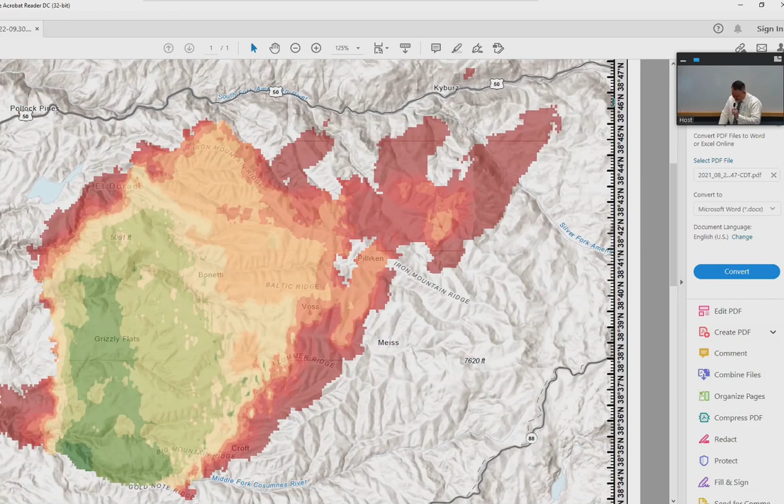And General Manager, did I miss any additional information you'd like to cover? Just to recognize Dan and the operations staff. This has been a very labor-intensive effort in coordinating with the fire group over at the fairgrounds. We attend, I think, 3 meetings a day over there to get the latest updates. There's a cooperators meeting Dan or his staff attends to make sure we're fully coordinated with the fire response operations. And I thought it's been just extremely successful in having that operation coordinated that way.

That pretty much concludes the impromptu briefing of the board. But again, congratulations, Dan, on the efforts so far. And I know the staff has been very, very tired lately, so we'll be implementing kind of rotation and some shifts on that. But good job. Thank you, Jim Landers, we'll definitely pass along your appreciation as well, and I know staff very much appreciate your recognition for their efforts.

We also remember that a large number of our staff are actually evacuated from their homes at this time, so we're having a significantly different work situation, and they're also going home to friends' houses, to hotels, to trailers, so just keep them in mind, please.

Thank you. I just want to make one comment before we go to the clerk of the board. I understand many, many of you are exhausted, and with great appreciation, many of you have even lost your homes. And that is something that we can't take lightly, that you are working full-time, 24 hours a day, and I talked to a person who is an ER physician at UC Davis. He too is exhausted.

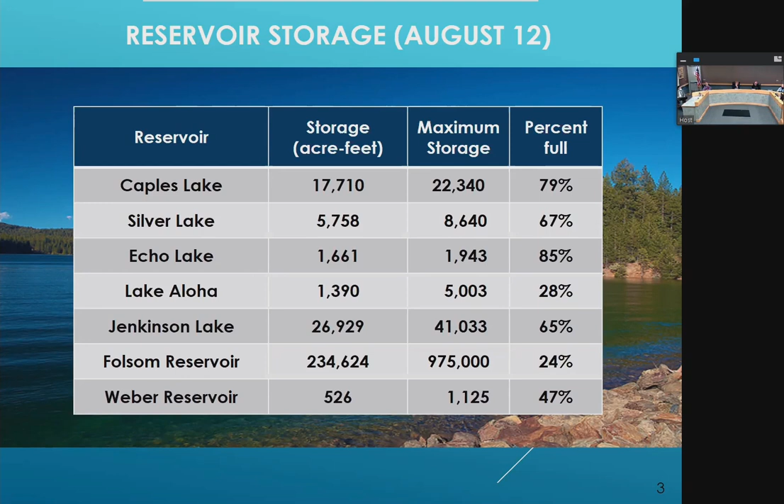Right. I do have a question, if you're done, Alan. On Silver Lake, have we reached out to Amador County to say that we may have to get a deviation from our agreement for the September 15th drawdown that we normally carry with them? I actually don't see the need to do that, Director Osborne. We're a little lower by about 500 acre feet than we typically are, but we don't foresee the need to have any variations from any of our current operational commitments and/or license requirements for this year.

We are actually planning on having a shorter outage and then come back online in the fall to resume diversions from Silver Lake during the last part of the year. Some years when we have larger flume replacement projects, we'll be offline until January. In light of this week's events, we'll continue to watch, but we're planning to come online about the middle of November this year. So a shorter outage, a short maintenance period, get back online and start moving that water as quickly as possible, to prepare us for extended drought conditions. Okay, thanks.

Next slide. Sorry. You can tell everybody's propping me up here. Okay, next slide. Okay, I continue to try to improve this slide for you.

As you see, the wetter years we've really put in the background. We're focusing on these comparative years here. Just for orientation, members of the public, this is the storage history of Sly Park Reservoir since it was constructed. This is the only district reservoir that is a 2-year supply reservoir, designed specifically for the purpose that we're in right now, the second year of drought type conditions. Red is our actual operations this year, and the dotted line through the rest of the year is, under a conservative scenario of no precipitation through the end of the year, where we would likely be by the end of the year.

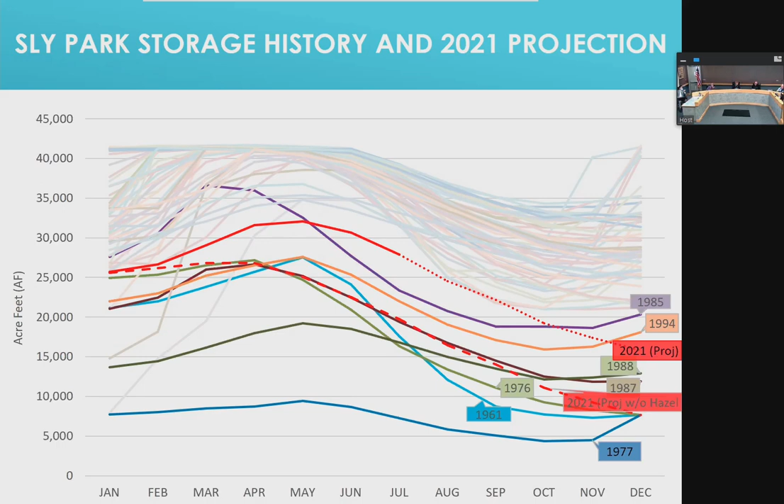And before we leave this slide, we are pursuing the point of rediversion to bring water up and divert out of Kyburz. If we're able to do that in a drought situation, that solid red and then dotted line would be up even higher. That's kind of our drought backstop. So that's why it's so important for us to have that point of rediversion approved. Next slide, please.

And then Brian's staff put together weekly updates for us, slightly different numbers, slightly different comparison, but this is just our water usage since the board's action on June 28th. So we're about 2.3% overall higher as of August 11th. Haven't had a chance, obviously, the past week or so to update this. So it'll be really interesting to see next time we get a chance to come to you in the middle of September how we continue to make progress on that.

Next slide, please. Dan, if I can, on that slide, I think I've mentioned it before, I probably will mention it again, that I'm glad we have the 2013 comparisons in there, because I think our district-wide and our customer conservation efforts since 2013 have been very significant. And I think we need to recognize that.

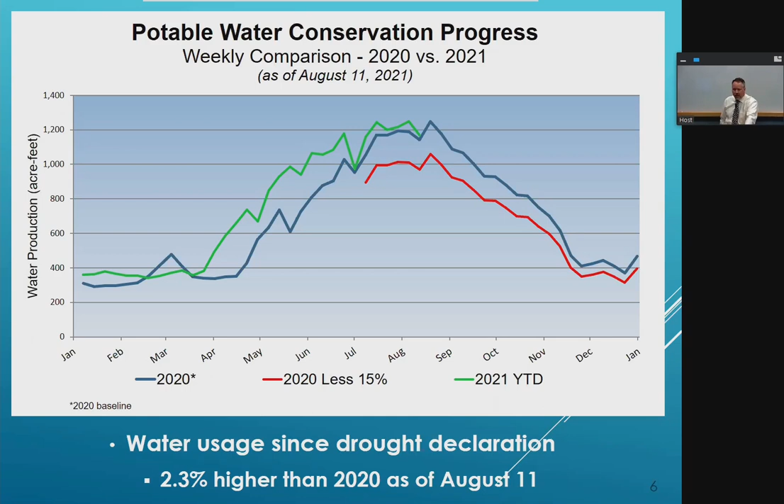Our wastewater recycled water operations manager, Tracy, gave you a nice detailed presentation last time about how we operate our recycled water system and how our potable water system supplements its operations. All of their scheduled operations remain on track and continue, notwithstanding this week's events. Our operations continue. That reservoir at El Dorado Hills is on target.

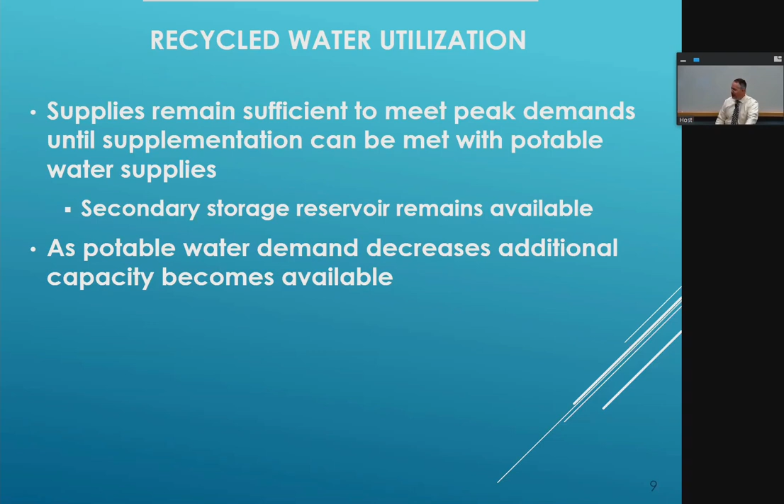Things are going well. As we get this week's numbers, it will be interesting with the smoke and the inversion. Cooler weather, we likely had a pretty good dip in demand this week. I just haven't had a chance to look at it. So next slide, please.

And I think we've really talked to this point, so we don't need to talk any more to Folsom. We gave this update the last meeting. Fortunately, we were able to maintain diversions through the end of July, so over a month. The notice of unavailability of that water supply, I believe, was June 15th. General Counsel, correct me if I'm wrong, but I believe it's June 15th.

So over a month, we were able to sustain operations there through that alternative release from Sly Park Creek that General Counsel was able to secure. So that was a significant win for the district and for the resources. So we're currently in stage 4, and we're providing public health and safety level supplies from the district's main system.

Every day, we're trucking water from the Pleasant Valley area down to Outingdale. Obviously, that's being coordinated with emergency operations because of the evacuations on the east side of that road. The Outingdale community itself is voluntary. East of that is mandatory, because of the active fire situation. We've been, through email, mailing, and phone calls, really reaching out to our customers to make sure they're aware of that situation. And our daily hauling is right on target, about 26,000, which is that public health and safety allocation.

Again, this past week may be a little bit different because of people voluntarily evacuating out of the area, but we're right on target. We're where we should be in terms of the amount of water we should be delivering for public health and safety purposes. And, as you just heard at the beginning of this meeting, we continue to look for potential grant funding for some of these operational expenses.

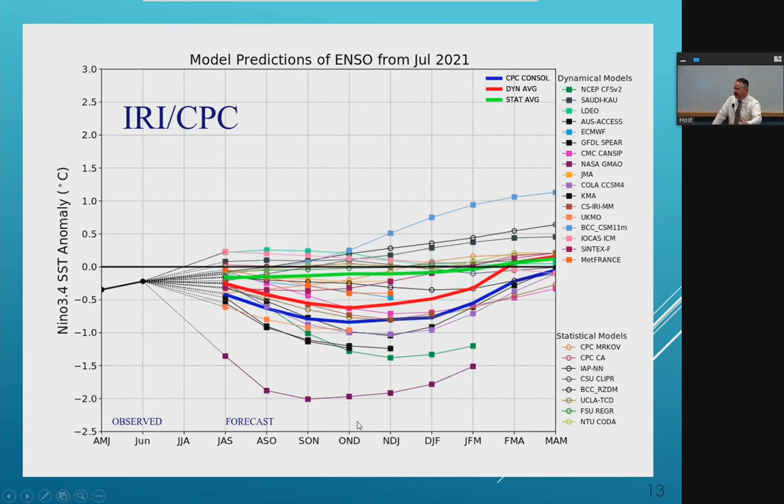Next slide, please. I think everybody's well aware of the lake levels. I think we had a very smooth transition to speed limit restrictions a little earlier than we typically do. We do still have about a dozen boats that are out on the reservoir and are unable to be removed. They were scheduled to be removed by yesterday, but obviously we'll be extending that for those folks.

But there's no damage to any district resource, as I said, or any private assets on the reservoir, fortunately, at this time. They'll probably need a wash of some of the ash on them, but other than that, everything's fine. There's a very heavy law enforcement presence in the region, so we're not concerned about security of those facilities. Once that happens, we will tow that.

This usually happens every winter, but a lot of people aren't up there to see this. You will see the mooring facility pulled out in the middle of the lake, and that's because it can't sit on the lake bottom. It's a typical operation. It's just happening while people are still up there, at least before the fire. So they may ask, why is that thing in the middle of the lake? And that's just to protect it during low water conditions. Next slide, please.

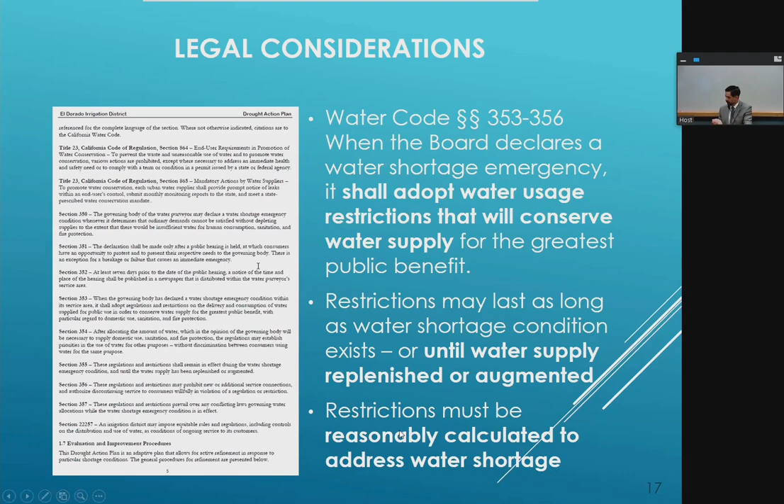So I've just highlighted a couple of relevant provisions here, since Director Day asked specifically, do we have authority to impose a connection moratorium? In other words, can we restrict new customers from connecting to our system? And the answer to that is yes, the district does have that statutory authority under Section 356 of the Water Code. It specifically authorizes connection moratoria.

But again, going back to the provision that I cited on the previous slide, any water use restriction, including a connection moratorium, must be reasonably calculated to address the shortage that exists, okay? If, for example, we have abundant water supplies, then of course, the argument is, well, a moratorium on connections wouldn't be reasonably calculated to address the condition that you have.

And then finally, I just note here that the relevant standard of review under the Water Code is that any action that the district takes to restrict water use must not be fraudulent, arbitrary, or capricious. And that's a fairly deferential standard of review to the district, particularly the fraudulent part. But any restriction, if it's not reasonably calculated to address the shortage conditions that we have, could potentially be deemed arbitrary or capricious.

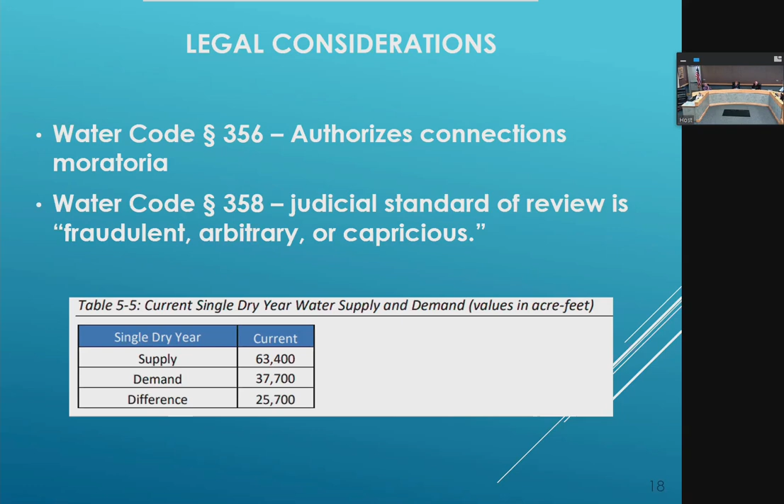So this may actually be my last slide. I thought I had one more chart here on the next one that just showed that, yeah, here we go.

So this is just building upon the last slide that showed our current water supply versus demand for a single dry year. This chart, again taken from the recently adopted urban water management plan, just shows the 5-year outlook. So multiple dry years looking into the future: what are the district supply and demand? And bottom line is, if you go to the right column at the bottom, in the 5th consecutive dry year, as far out as 2045 into our planning future, we still maintain more supply than we will have demand at that point in time. So.

And one of the other, it's more of a long-term question. The question I'd ask was, what are we doing to strategically plan for climate change? I had included a link, because whatever your opinion on climate change is, the U.S. Marine Corps and the U.S. military are planning strategically to cope with it. And so I think if they are, we need to as well. And then, Jim, if you want to touch on what the region is doing. The region, including the water agency, has been preparing the American River. Oh, I'm sorry, Brian, why don't you do that?

Yeah, we've been somewhat involved, but it's mainly been Reclamation, which has a study going with PCWA and El Dorado Water Agency on potential climate change impacts and mitigation actions, looking out 100 years or so. We've been part of that, feeding them information about our system and potential impacts. That report's not yet available. It was supposed to be complete sometime this year, so we'll definitely take a look at that and implement some of those recommendations.

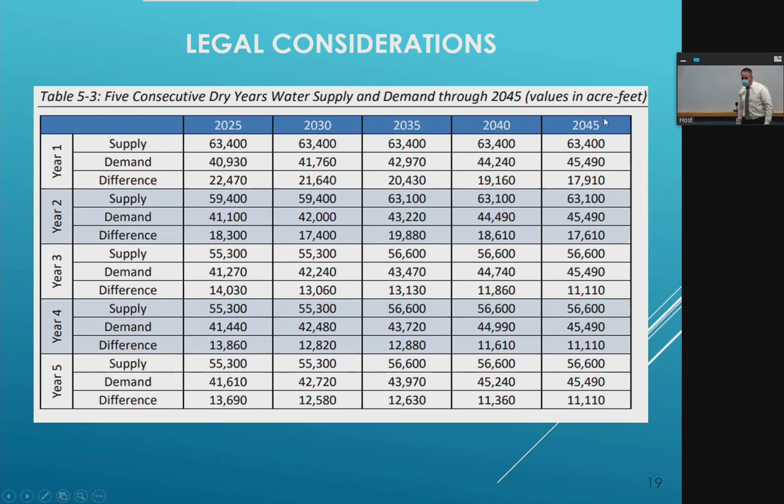All right, just on our topic of ensuring complete and accurate information, I want to make sure, as we discussed related to our partners down the hill, they too have contingency measures, as Brian described, in demand, also in their ability to access water. Actually the Bureau of Reclamation, because of their responsibility to get water to a different point of delivery, does have emergency measures in place. I don't want to leave you thinking they will run out of water before we do. They are implementing similar measures. We're aware of it from a broad level, but we only talk to the level of detail about what our specific agency is doing. And that concludes staff's presentation.

Thank you very much. It was quite a bit of detail, and posting it on social media continues to keep our people informed. So we're going to move on to the action items, item number 10. Director Anzini, you might want to ask for public comment on that information item. Okay, thank you for the reminder. Is there anyone from the public who wants to make a comment on that presentation? Director Anzini, at this time it does not appear there are any members of the public wishing to speak on information item number 9. Thank you. All right, we'll move on to action item number 10. Move one. Second. All right.

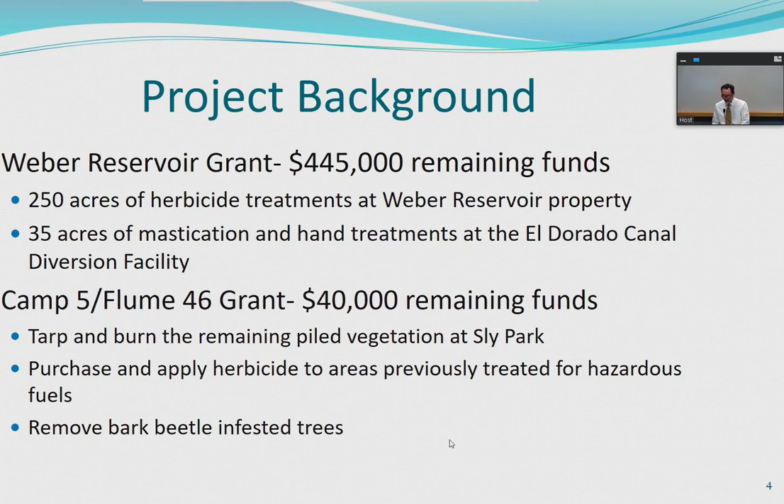Project objectives for the El Dorado Canal diversion facilities are to reduce hazardous fuels and protect district infrastructure and nearby communities, increase the forest and landscape resiliency, and reduce the rate of spread, duration and intensity, and fuel ignition into the crowns of conifer forest.

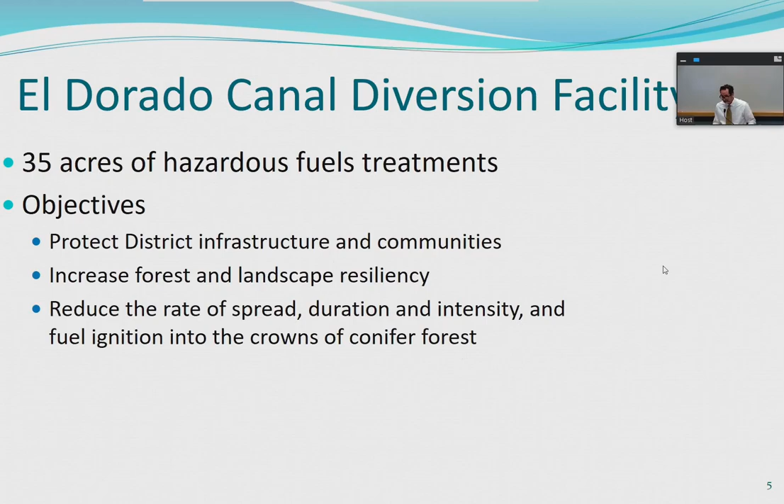Next slide, please. Here's a bit closer of the... Jen, can I get the pointer, please? I will.

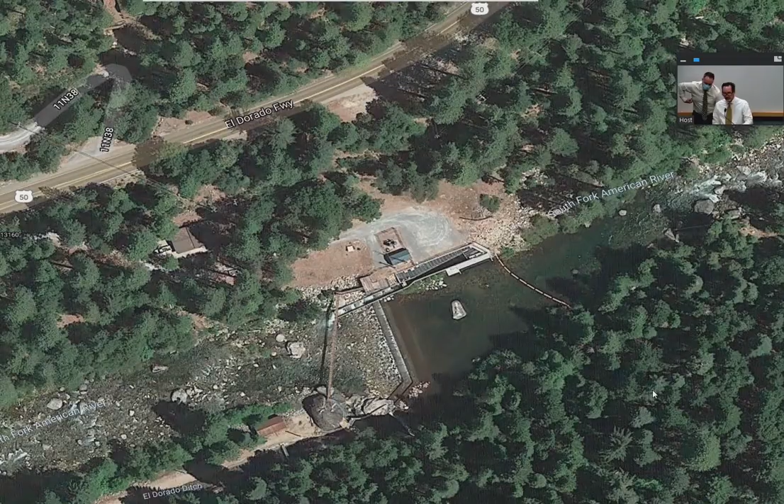Here's a photo of the treatment area looking up and south of the canal. This is just a typical area throughout, that shows the dense fuels that are on both sides of our facilities. Next slide, please.

Moving on to the Reservoir A water treatment plant. The project objectives are the same as for the diversion facility, and that would be to protect district infrastructure and nearby communities, increase the forest and landscape resiliency, reduce the rate of spread, duration, and intensity, and fuel ignition to the crowns of nearby forests. Next slide, please.

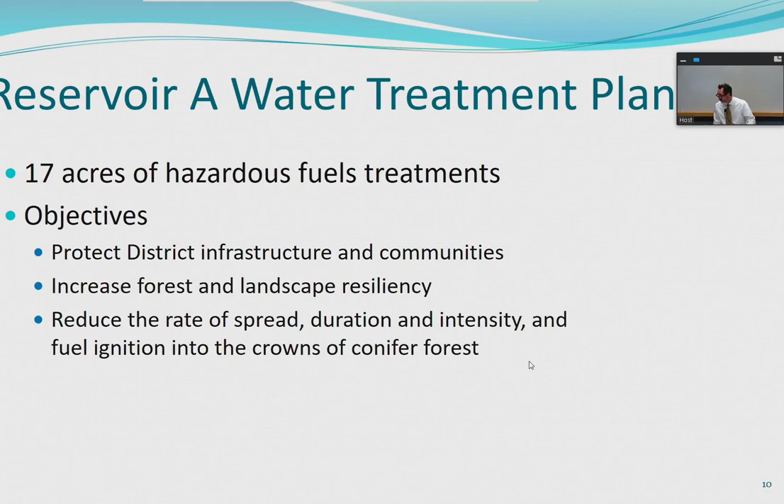As Director Corcoran mentioned earlier, Reservoir A does not go offline and continuously supplies potable water to the district's customers, as well as supplies the majority of the district when the El Dorado Hills drinking water treatment plant is down. It is a critical facility that has a high priority of protection. Next slide, please.

Turning to the California Environmental Quality Act, the board adopted the MND for the diversion facility in June of this year, and staff will file a fuels management exemption for the Reservoir A facility upon the board's award of this contract. Next slide, please.

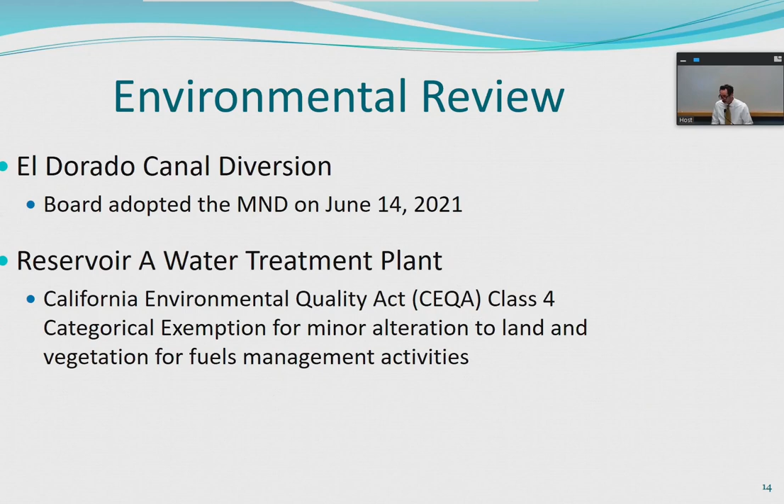The scope of work for the contract includes 10 acres of mastication and 25 acres of hand treatments at the diversion facility, and 15 acres of mastication and 2 acres of treatments at the Reservoir A facility. In addition to the mastication at Reservoir A, that removes all vegetation 10 inches in diameter and below, the Reservoir A scope of work includes removing 45 standing dead or dying trees, as well as removing a large amount of downed trees that have been accumulating over the years. Next slide, please.

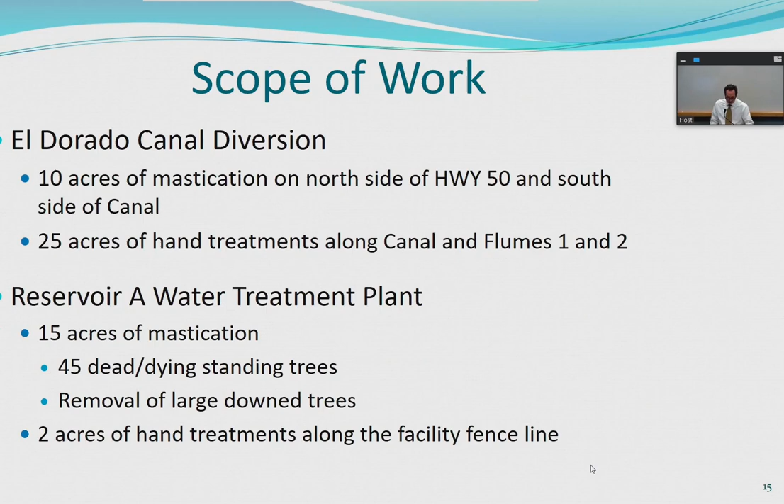Moving on to the received proposals. Staff received 4 proposals, and Julian Tree Care was the responsible low bidder at $182,500. Staff believes that the very large discrepancy between these received proposals was due to the high demand of forestry contractors as well as the relatively small project size.

Just to let the board know, in addition to the job walk, staff and our contracted forester met with Julian Tree Care. We conducted a follow-up site visit as well as reviewed the scope of work and the equipment they're going to be using. Also, Julian Tree Care provided references as well as successful past projects with East Bay MUD as well as the El Cerrito Fire Department. Our staff believes that Julian Tree Care is qualified and equipped to complete all the project requirements as well as meet the objectives. Next slide, please.

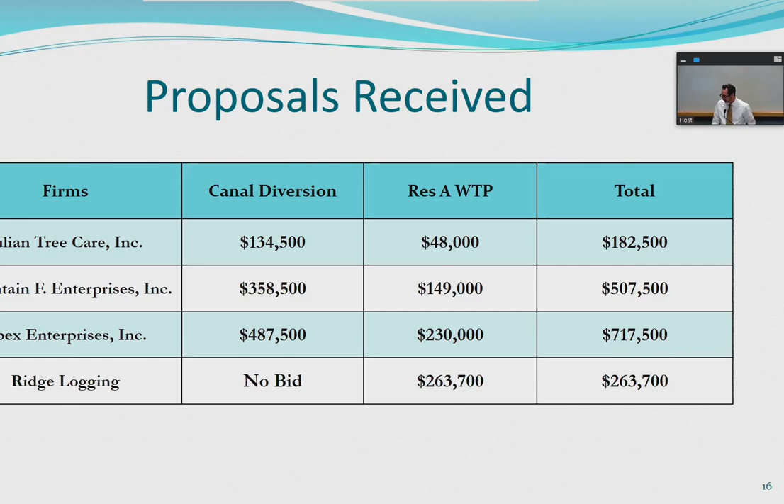So the El Dorado Diversion Canal treatments will be funded fully reimbursable through the remaining CAL FIRE Weber Reservoir grant funds. The Reservoir A treatments will be funded either by a pending CAL FIRE grant that we submitted in May of this year. We expected those results to come out at the end of July. I think they're a bit busy, so they have delayed that. A sister grant for forest health, those results have come out, and it looks like they're pending approval here.

However, if that grant is not awarded, staff will request to utilize the remaining funds from the Weber Reservoir grant just as we did for the diversion. Staff time for administration and project management for the grant are reported to CAL FIRE as in-kind matching funds.

Next slide, please. Board option 1 would be to award a contract to Julian Tree Care Incorporated in the not-to-exceed amount of $182,500 for hazardous fuel treatments at the El Dorado Canal Diversion and Reservoir A treatment plant facilities for the El Dorado Canal Vegetation Management Project.

Next slide. And option 2, the one that's been changed, to award a contract to Julian Tree Care Incorporated in a not-to-exceed amount of $182,500 for hazardous fuel treatments at the El Dorado Canal Diversion and Reservoir A water treatment plant facilities, and authorize the general manager to renegotiate the scope of services if necessary due to the impacts of the Caldor fire. Option 3 would be to take no action, and staff recommends option 2. Move to. I'll second that. Okay, there's been a motion and a second.

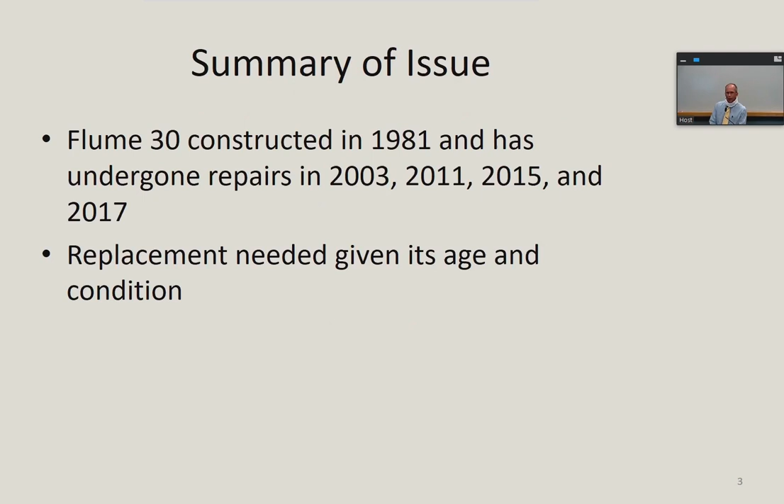Scope of work. We have 3 different scopes of work for this project. The first scope is going to be getting the roads in to access the flume. I'll discuss more of these as I go along through the presentation. The second is to improve the Narrows bypass road. The board will remember some of that, the issues that we've had with that little stretch of roadway. And then next year will be the actual construction of the Flume 30 replacement.

So the road work, the original road work is a 3-mile Forest Service road that is currently in existence. We will be doing a 2,200-foot-long road from the end of that road down to the downstream portal or to Flume 30. And then the actual construction for the flume will be the new mechanically stabilized earth walls and flume sections that will be back in concrete. We'll also be doing a little bit of stabilization on the downstream side of some of the hillside down there. Next slide.

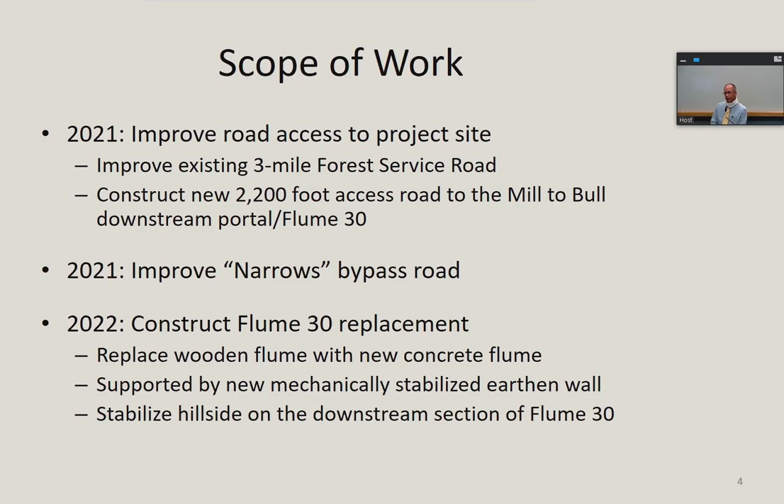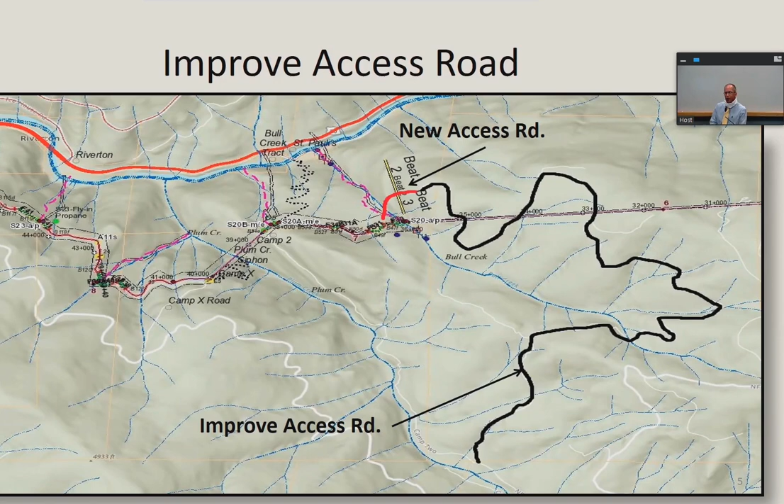So here's the access road. So the portion in black is the 3-mile section. The portion in red, this is roughly drawn in by me, not to any scale or artistic ability, but that is our new access road that will come down onto the old bench and tie in. And can I go to the next slide? We have some pictures we'll get to.

So once again, reiterating, this is a 3-mile long access road, 2,200-foot long connecting road down to the flume. This did eliminate the use of helicopter. We had an estimate of around $4 million for the use of a helicopter. The roads are going to cost about $2 million to get in, so a net savings to the district of $2 million to get this, plus the ongoing ability to reach the Mill to Bull and Flume 30 connection. So those are pretty substantial benefits with just those right there.

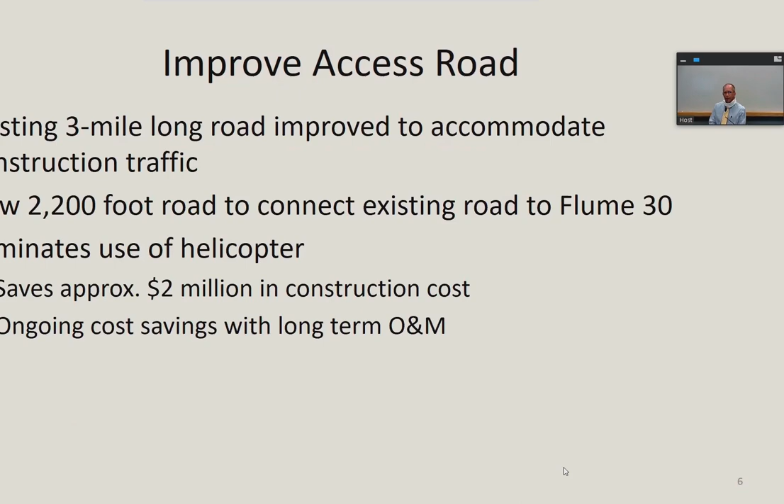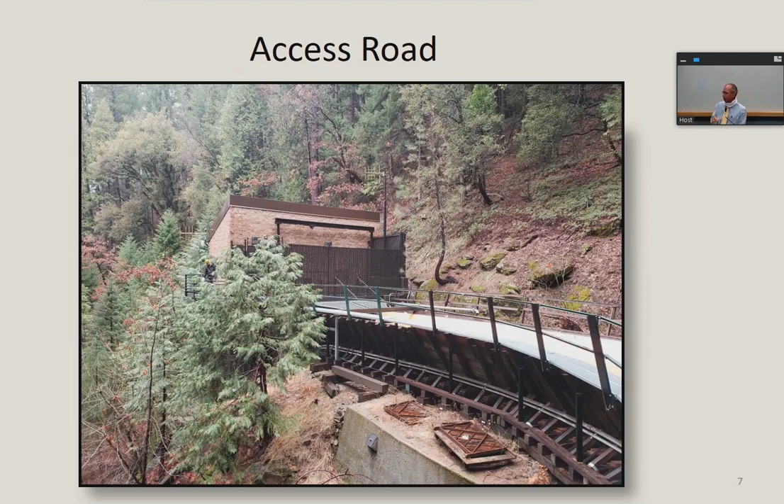Next slide. So this is the Mill to Bull portal right here, and Flume 30 coming out. This road will come onto the right side of that building and connect down into Flume 30, and we'll be using this for construction. We'll be spanning Bull Creek. I'll show you some slides to that a little later on. Next slide. This is the back side of that same building. Those rocks on the left will be removed, and a roadway a little further closer to us will start and go up and over that building.

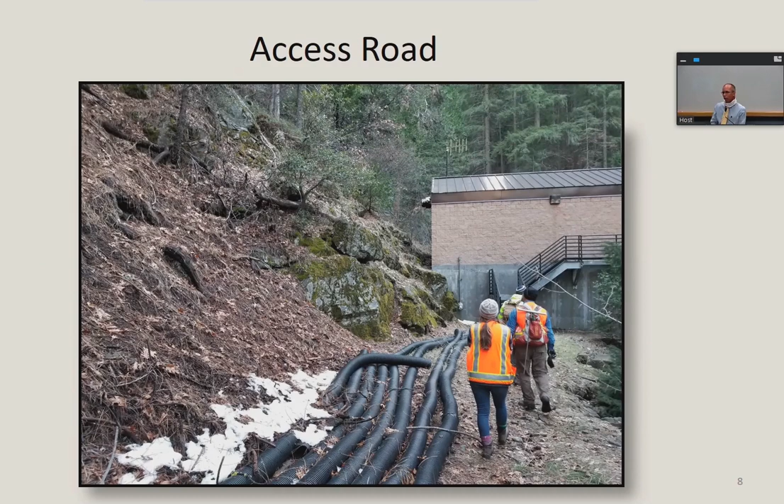Next slide. This is the hill that will be coming down. As you can see, it's pretty steep terrain. It's going to curve around and wind around. But this is what we're getting. The grades will be pretty tricky coming down, but it's all doable and stuff that we've done in the past.

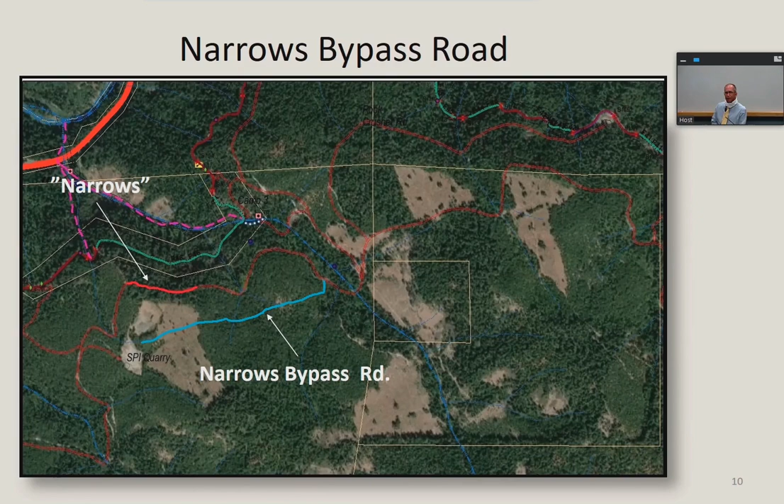We've also had lower speeds to get through this site, and as of our Flume 38/40 job, we have weekly monitoring of the road, meaning that we have a survey crew go out every week, and we have, I believe it's 20 survey pins in the road to detect any movement. So it's quite a bit to just be able to keep using this road. This road, when we are done with it, will only be accessed by SPI and EID. It'll be behind locked gates and only for our use. And it will be all weather.

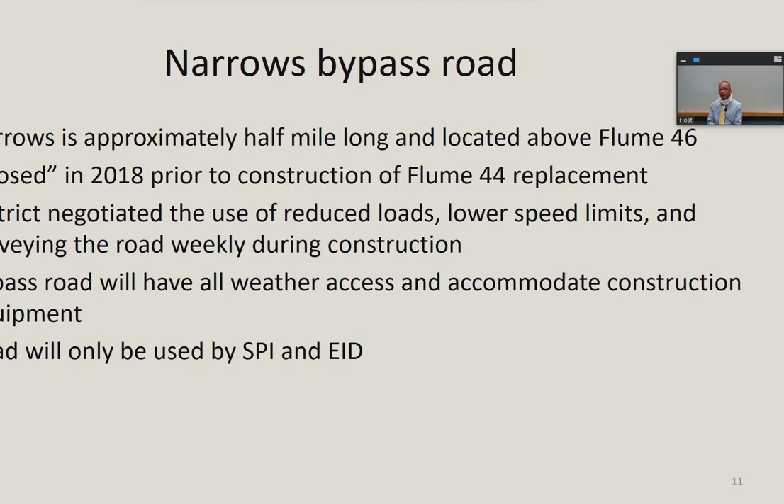It's dirt. We will be putting rock down to make this all weather. It will be able to be plowed so that we can continue to use it to get to our sites on what we call the Beat 3. And this becomes really beneficial because right now on the narrows, we aren't able to really plow the road. We have to scoop the snow all out because right below the narrows is Flume 46, so we can't let the snow go over the edge.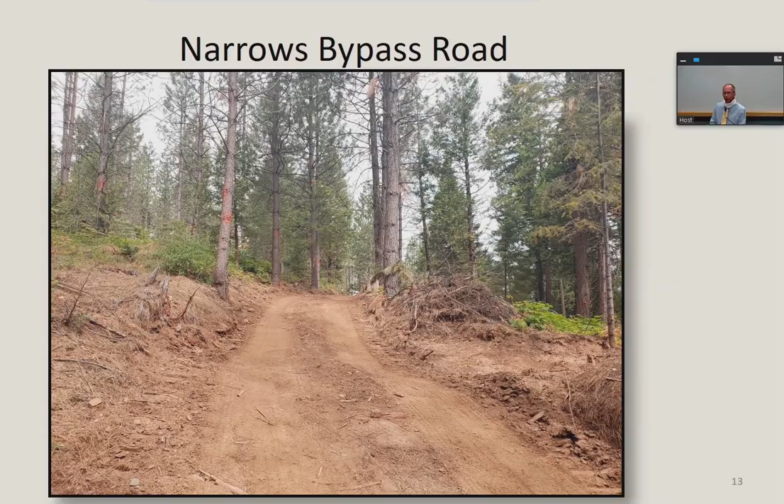Next slide. Now then, Project 30, or Flume 30. You can see its proximity to Flume 44. Just for convenience sake, Flume 3840, which we're just finishing up right now, is right there. This is located about 6 miles in on Plum Creek Road, and then we come in off of Camp X Road. Next slide.

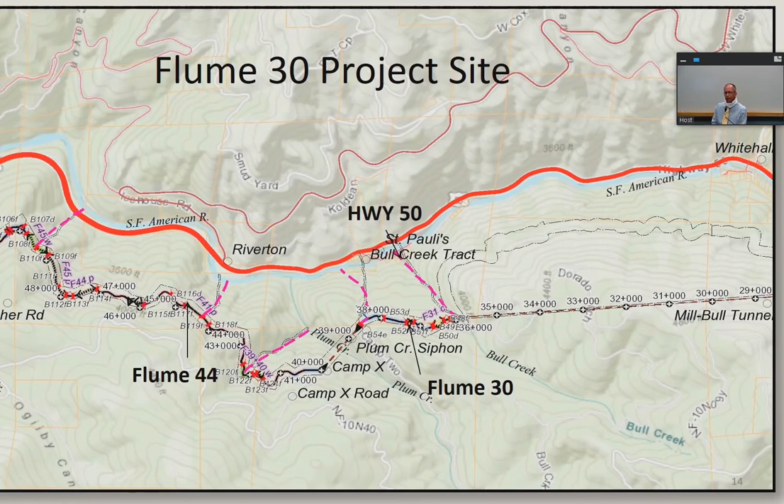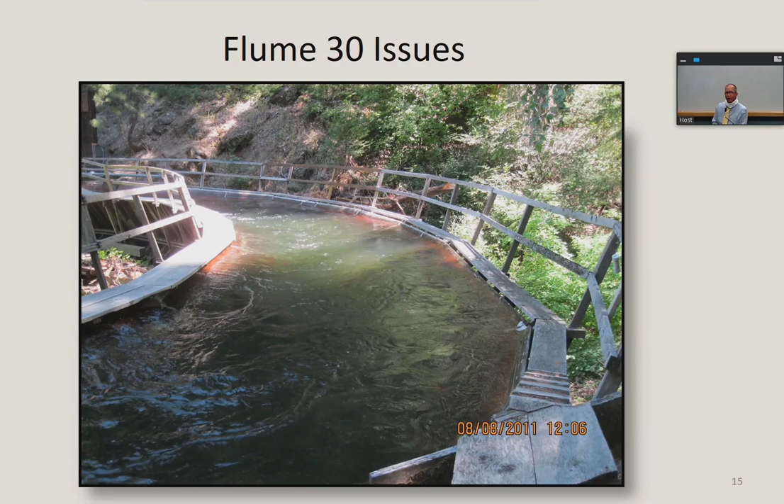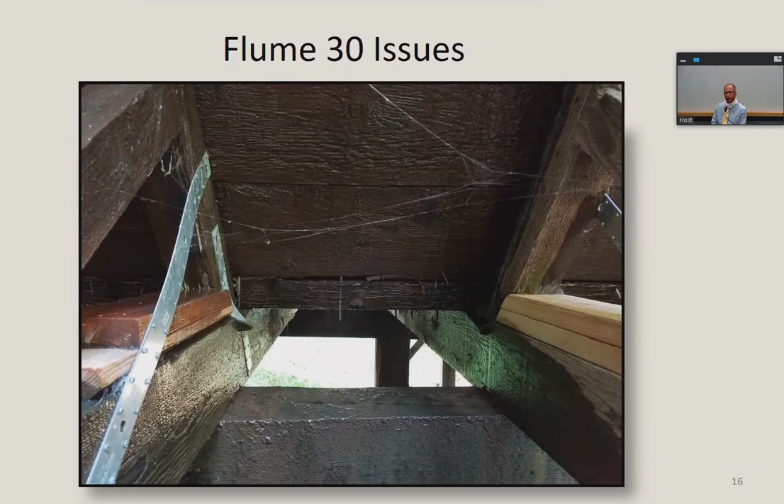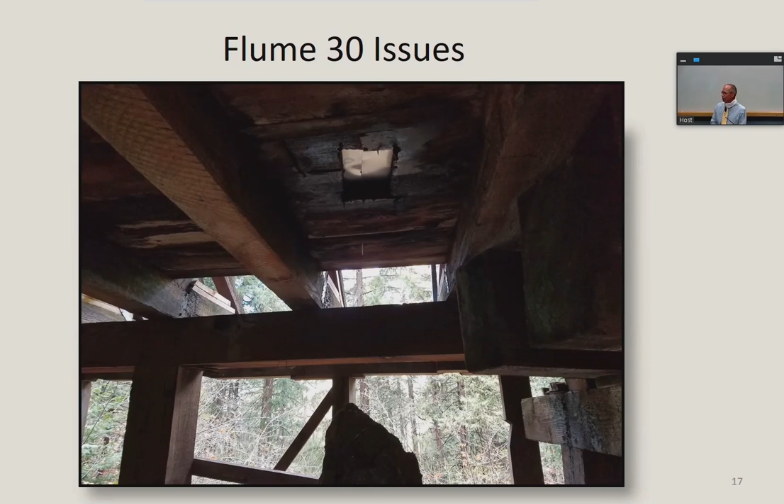Next slide. This is one of the holes that was fixed. Again, deteriorated wood. Cut it out, a little section in here. We put metal plate over it and epoxy that in. Again, just to keep the leaks under control. Next slide.

Oh, thanks, because it looks like one of my home repairs. Well, it's also like one of my home repairs too. I try to bury those behind walls.

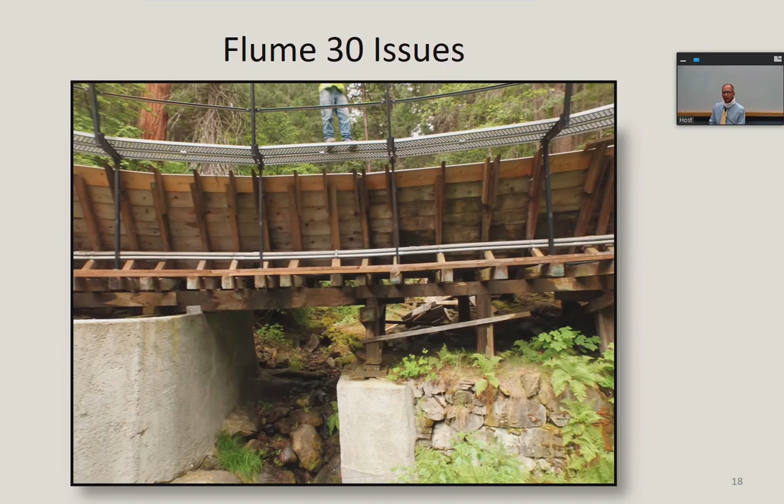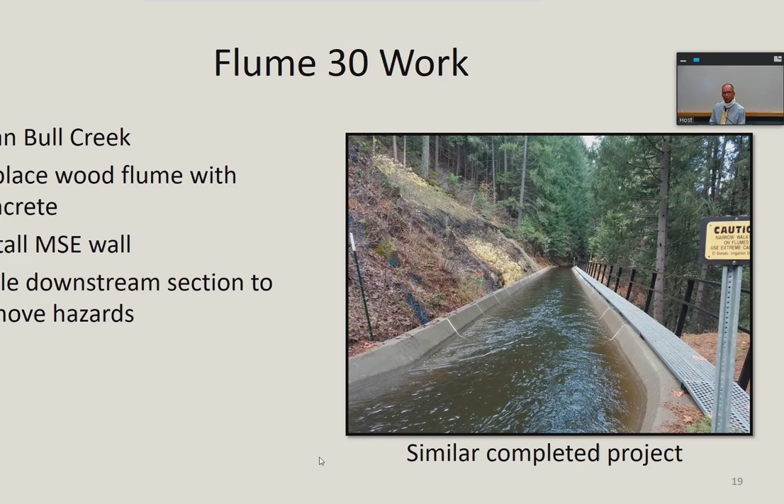So for the environmental portion, we have gone through a mitigated negative declaration that was approved in August of last year. We have received our permits from the Corps, the Regional Water Quality Control Board and the Department of Fish and Wildlife. We've also gotten our approval from FERC, the Federal Energy Regulatory Commission. So we're ready to go with this project. With this project, we're also asking for 3 contracts to be awarded, and I'm going to go over each one of those right now.

The first one is our construction contract. We received 2 bids for this. KW Emerson, if you recall, they were the ones who've done Flume 44 and 3840 for us, at 9.9, and Syblon Reid, whose bid was 8.8. And Syblon Reid's done Flume 10. Remember our 2017 storms? They did a number of work in Flumes 10, 5, and all through that area. And then also recently the Pacific Tunnel last year. They were the contractor for that work.

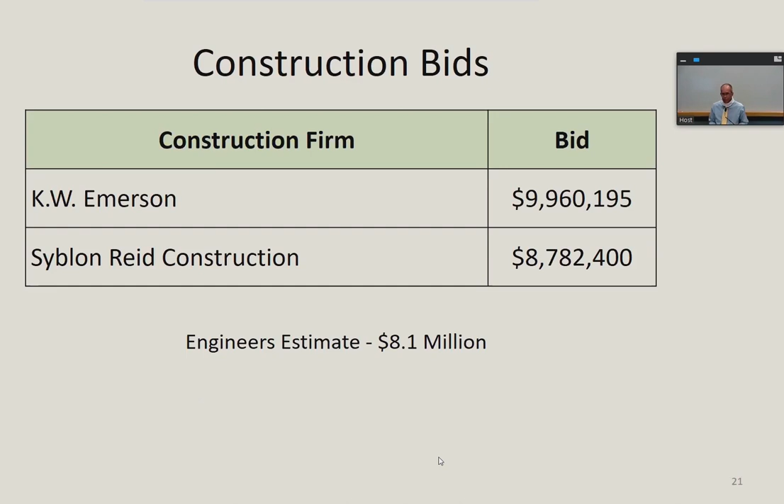Engineer's estimate for the project was $8.1 million. Many of the board members are aware that commodities have gone up in construction. Wood has especially gone up, steel, concrete. And so I'm pretty sure that's why we're seeing a little difference on our engineer's estimate. The engineer's estimate was done at the beginning of the year when we were wrapping up design. So during that time, we've had those increases in cost.

The next contract that we have is the Construction Engineering Services contract, the CES. The biggest part of this is our Quality Control Inspection Program. This is a part that is required by FERC. In order to get approval by FERC, this plan has to be in place. The CES portion will be responding to all our RFIs and our submittals. They go out to the field if there's any field clarifications, or help us with our change orders. The QCIP portion is all our specialty inspection.

That's making sure that our concrete is done right, the rebar is placed right, the MSE wall and the compaction testing for the dirt on the roads and the walls are all up to specification. So all that is part of this QCIP. And again, this is all needing to be done before we bid the project.

We get this approval from FERC. So that's why this is a single source contract, is we had to go get this stuff in and approved. And GHD is our engineer of record for this project. And they have done numerous projects for us. And the contract, again, single source for $697,450 is for this portion of inspection.

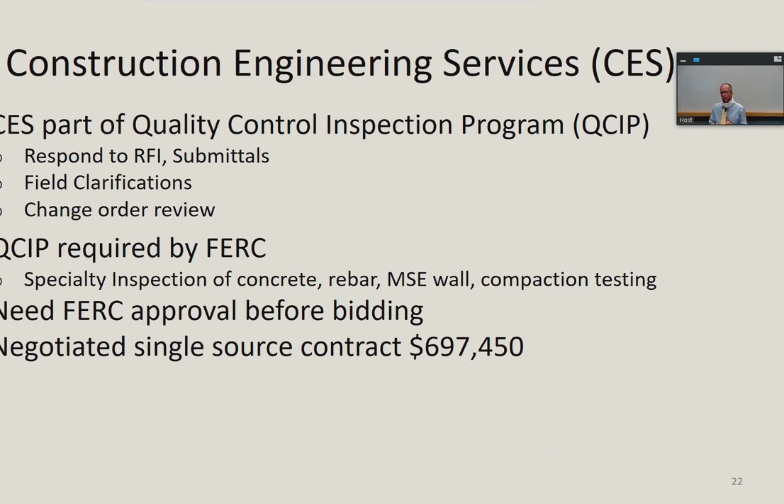Next slide. In addition to that, we have our general inspection. These jobs go 24/7. We don't have the staff to fully implement a 24/7 in-house inspection. So we go out to bid for these services. We received 3 bids from GHD, MGE, and Gannett Fleming. All these firms have done work and are doing work on several of our flume projects right now.

All these contracts were done at 2,500 hours. So the discrepancy that we see here is the amount that they put towards their staff to do the inspection. And GHD had a lower per person bill rate, hence the lower rate.

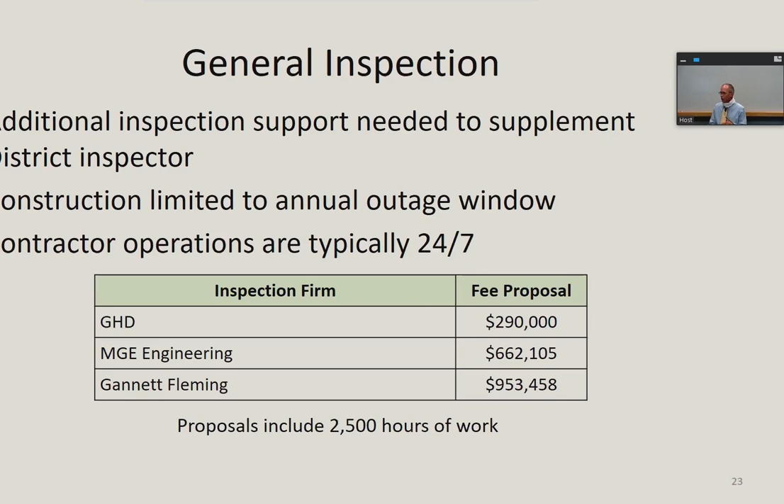They also, since they are up there for our QCIP, gave us a discount, because the same staff will be up there doing that type of work, so they were able to have some efficiencies in their cost. MGE and Gannett Fleming also had external staff in addition to their own staff, which also accounts for some of the increased costs. Next slide.

So the cost breakdown that we have for the project is listed here in this table. We've gone over all the other portions of this. The one part that I need to mention is our environmental monitoring. We have a creek where, while we're in construction, we need to do monitoring. Plus, by our permit with Fish and Wildlife, we have some post-monitoring after construction that we will do, and that's what those costs are for.

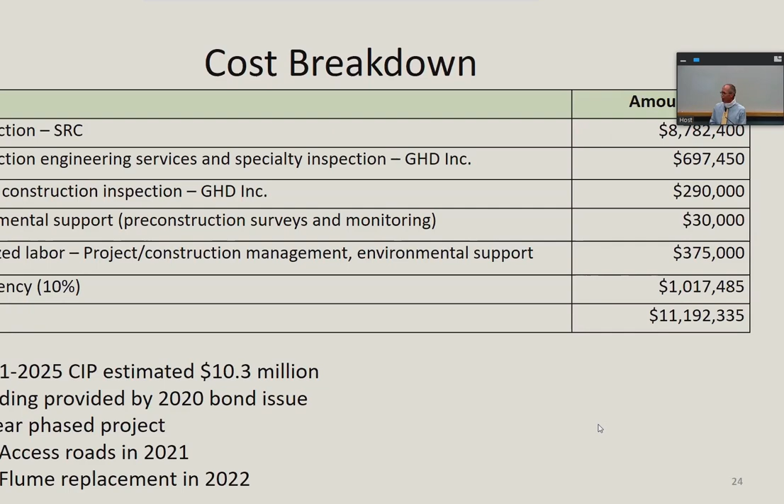So for the CIP, we had $10.3 million. Total cost for this project right now is at 11.1. That includes our contingency. Again, this will be funded by the 2020 bond issuance, and this is a 2-phase project for 2021 and 2022. Next slide, please.

So option 1, to award contracts to Syblon Reid in the not-to-exceed amount of $8,782,400 for construction of the Flume 30 replacement project, to GHD in the not-to-exceed amount of $697,450 for construction engineering services, and GHD in the not-to-exceed amount of $290,000 for general inspection,

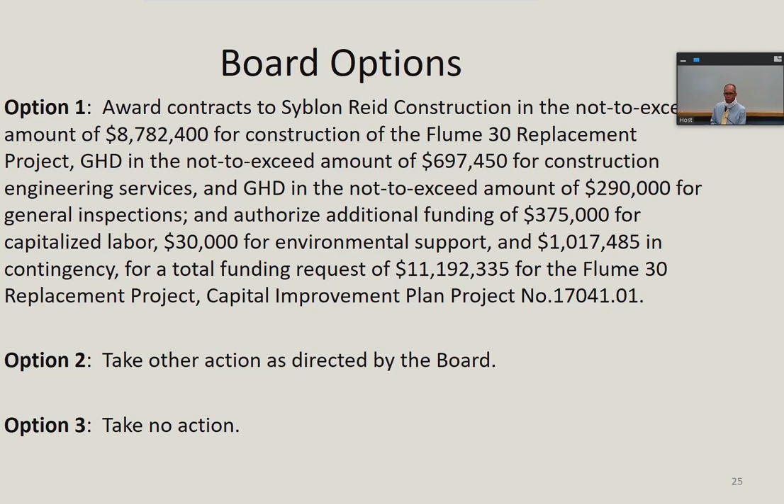and authorize additional funding of $375,000 for capitalized labor, $30,000 for environmental support, and $1,017,485 in contingency, for a total funding request of $11,192,335 for the Flume 30 replacement project. Staff recommends option 1.

Camp will move option 1. Second. Okay. Any questions from the board now? No? Questions from the public? The only thing I'd add while Jennifer's looking for the public comment:

This was actually in the path of the fire. Yeah. And we were going to negotiate with Syblon Reid to reduce their bid because it was burnt up and they didn't have to remove it. But the good news is it's still standing and operating just fine. It's good to get it made into concrete.

Yes. Okay, anybody from the public? Director Anzini, it does not appear there are any members of the public wishing to speak on action item number 12. Would you like me to call for the vote? Yes. How do you vote? Division 1, aye. Division 3, aye. Division 4, aye. Division 5, aye. Divisions 1, 3, 4, and 5 voting aye, motion carries.

All right. This concludes the action items on our agenda. Any review of assignments? None today. All right. I would like to just point out, I know Director Day has requested this. At the next meeting, September 13th, we'll be reviewing the district water master plan as part of the tentative items coming up. So that will be there along with all the other items listed in the tentative items.